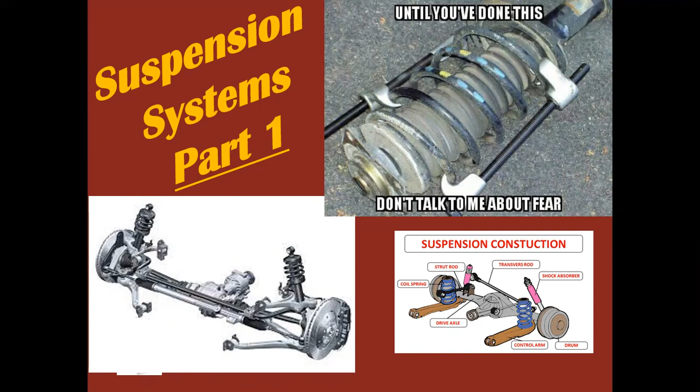We're going to talk about suspension systems today, and this is just part one. So all we're really going to do is review tires and wheels real quick, make sure you're fresh on it, and then we're going to get into wheel bearings, the different designs and types, and how you service those. That's all we're going to do today. We'll talk about tires, wheels, different types of wheel bearings, and how you service them. Simple enough, right?

Let's review real quick. Markings on the sides of tires, because we're working our way through suspension, and tires and wheels have a lot to do with that. Remember the markings on the side of the tire: there's your width, and your aspect ratio, or height-to-width ratio. The way I remember it, the first number is the width of the tread, and the higher the aspect ratio number, the taller the tire is - not necessarily wider, just taller. And your rim diameter is the very last number.

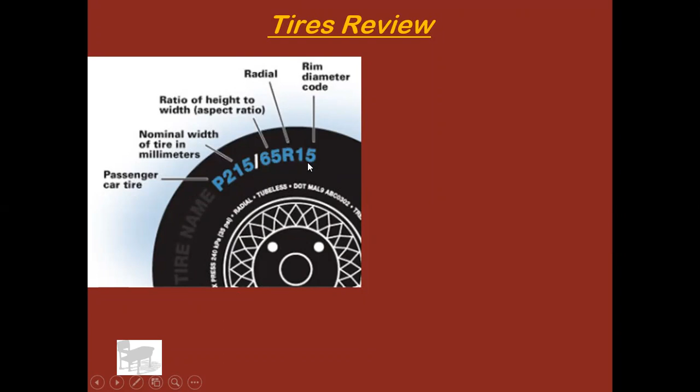There's your cutaway of a typical tire. Remember, the tire seals at the bead - right in this area. That's what matters, and that's what has to be clean when you're popping a new tire onto a rim.

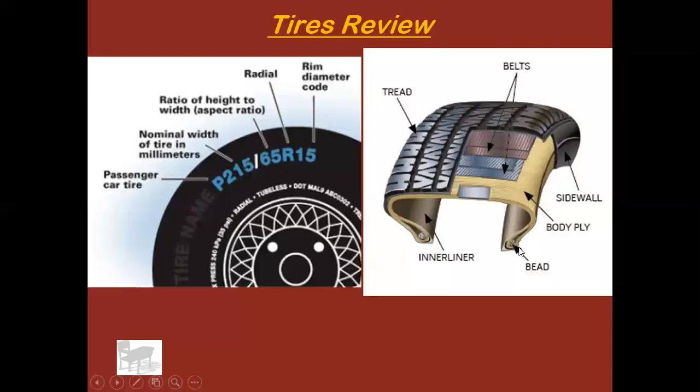Tires are rated for different loads. This is more of a truck tire, but notice it says right on the side: maximum load 2,830 pounds at 80 psi cold. So that tire can support about 2,800 pounds, and it's a load range E, as in Edward.

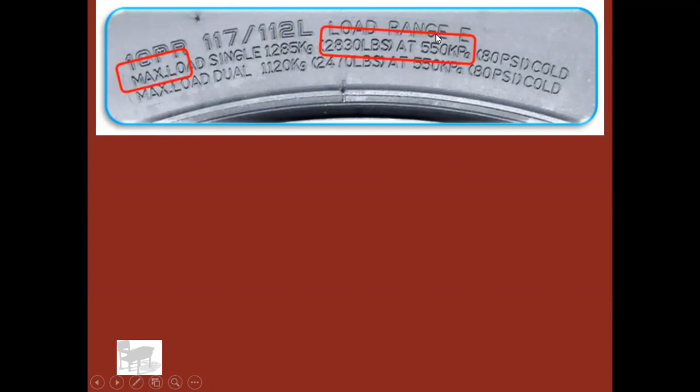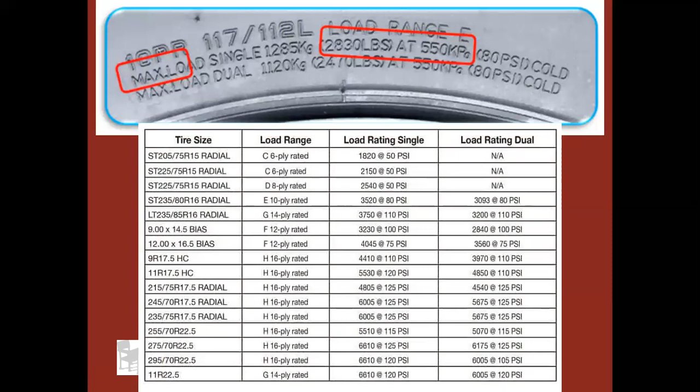Here's a quick chart - again more of a truck tire chart, but that's what you guys typically deal with anyway. The load range has to do with how thick the tire is, how many plies it has, and then you can see the load rating for the tire. Single means a regular single axle, not a dually like on the right side. Let's find our load range E right here - 10 ply, like a 10-layer tire. That's a real heavy duty tire, rated around 3,500 pounds per tire. Makes sense, right? Just gives you a rough idea.

Okay, enough about tires. I think you guys remember that.

Wheels - this is what's typically not remembered correctly or gets messed up. If you're looking at this cutaway, it's the wheel as if you were standing in front of the vehicle looking straight at it. Here is the street side - this side would be facing out, and this side would be facing into the vehicle.

Some specs to remember: your bolt circle diameter, or lug circle - that's the measurement from one end to the other. The diameter is not the outside of the wheel from top to bottom; it's right where the bead actually seats. That's a common mistake. The offset is another common mistake - don't confuse it with the back spacing. The offset is how far the mounting flange is from the center line of the wheel. Back spacing is the space between the edge of the rim and where that flange mounts. So don't confuse those two.

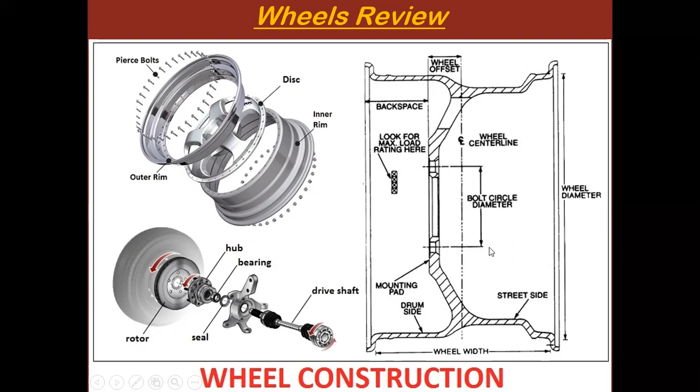Here's another diagram, since that's confused a lot, showing different back spacing. Street side is on the right. There's a lot of back spacing, a medium amount, and hardly any - they call that positive offset, zero offset, or negative offset.

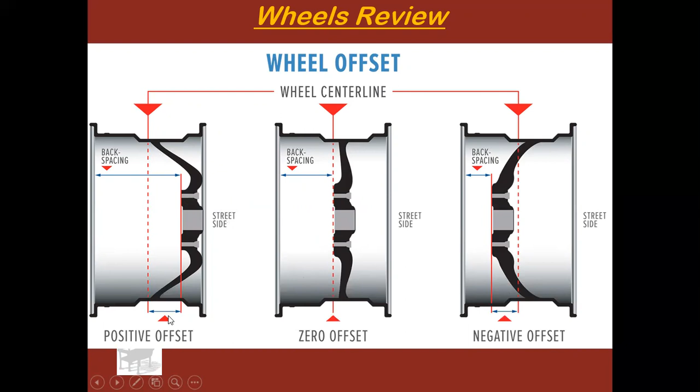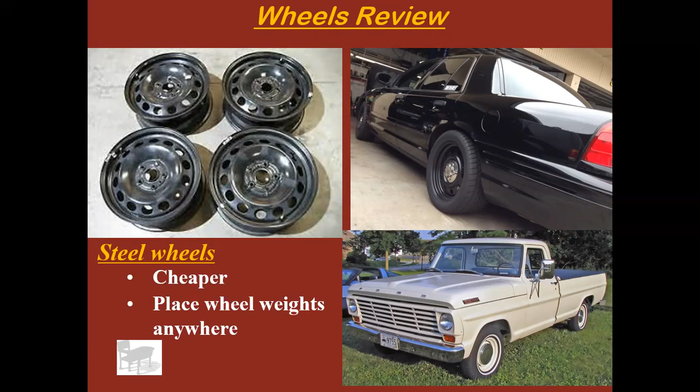Another thing with wheels: there are mainly two kinds, split by the material they're made from. These are steel wheels. They're a cheaper option - you can put wheel weights anywhere on them, on both sides, like you see hanging off there. Pretty easy to balance, but they bend easily. If you hit a curb, you're probably going to put a rash on the side of them, or bend them. You can use soapy water to mount tires onto them. We'll get to the other wheel type, and you'll see why that's not a good idea there.

You should only use tire lube like RuGlyde or Murphy's tire lube. You shouldn't use soapy water, because when the bead pops, the soap gets trapped between the aluminum and the rubber, and it can cause corrosion. Eventually you won't seal the bead and you'll have tire leaks. Your book will tell you to only use tire lube, not soapy water.

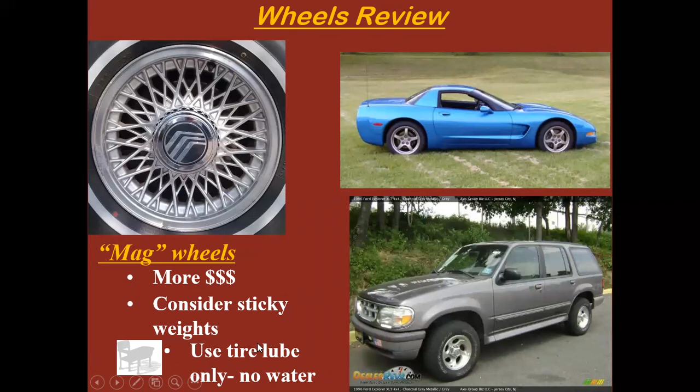The reason I put this picture up is this aluminum wheel. Notice something - why does it have corrosion just right there? Why is the rest of the wheel just about perfect, but right there in that little rectangular shape, it's corroded?

So why is that little rectangle corroded but nowhere else? Wheel weights. Someone stuck a wheel weight on here, and in the wintertime, when you go through salty, nasty roads, those wheel weights hold salt and water against the aluminum, and it turns into that. Don't use clip-on weights on aluminum rims, especially on the outside that faces the road.

I don't know why people do this. You should be using sticky weights instead - they're not that hard to use, and they're not expensive. You should use sticky weights on aluminum rims. Don't let this happen - it ruins a perfectly good set of aluminum rims.

Okay, so that's enough review about tires and wheels. Let's jump into it - there are different kinds of systems for wheel bearings. This is the old school system, common from probably the 1920s all the way up through about 99, maybe 95. You certainly see it in vehicles newer than that too, but that's probably the big era for it.

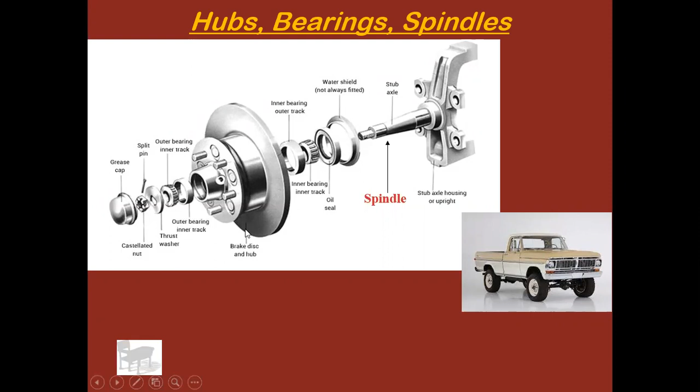I'm going to call it a tapered roller bearing setup, and it's adjustable. Again, used on the front of two-wheel drive trucks and rear-wheel drive cars, approximately pre-2000.

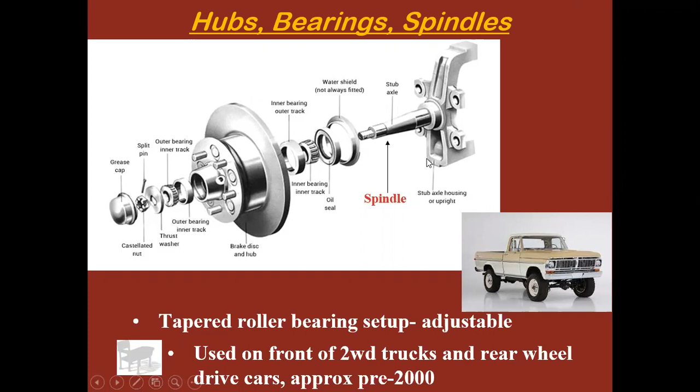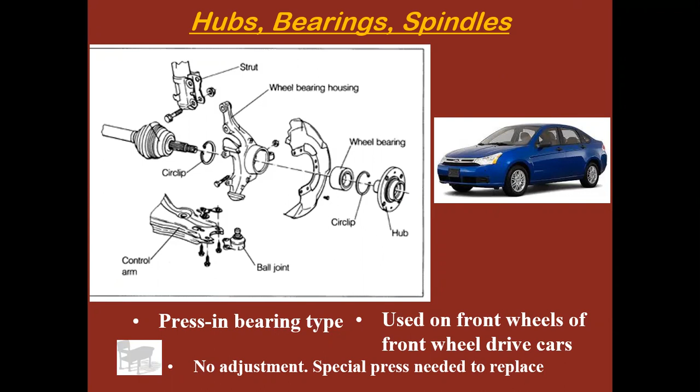It's a compromise. It's still cheap to replace a wheel bearing on this compared to the next setup we're going to talk about, but it's more labor intensive than the previous slide.

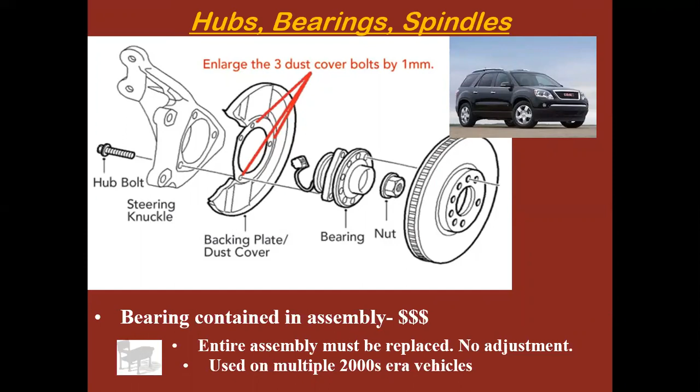The good thing about this is there's no adjustment, if you want to call that good. You don't have to torque anything - well, you have to torque it down to hold it in, but you don't have to worry about adjusting the actual bearings. Unfortunately, you will see this setup a lot.

So let's go back to this setup again, because this is the challenging one. The rest of them, you guys can read the manual and figure out what to do. This one, you kind of have to try it in class - you kind of have to practice. So let's go back to this.

And learn how to pack these bearings when they're new. Go ahead and watch this video.

All right, you should have just watched that video. It shows you how to pack bearings. You guys are going to have to do that.

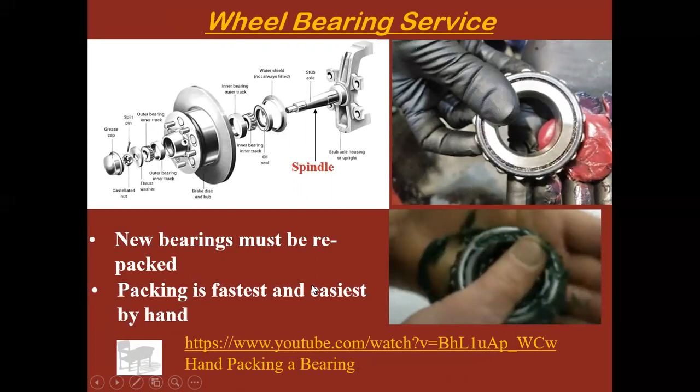Once you pack these adjustable roller bearings and go to reassemble them, there's a special procedure too. It's not just a torque - not just 'torque it to 30 foot-pounds or 100 foot-pounds.' You torque it, then loosen it, then torque it to a different torque and loosen it again, and you just keep doing that over and over. It's kind of an interesting process, and if you follow the manual and do it all correctly, it does work, but you've got to do it correctly.

Go ahead and watch this video this time. I'll give you a preview. Okay, you should have just watched that video.

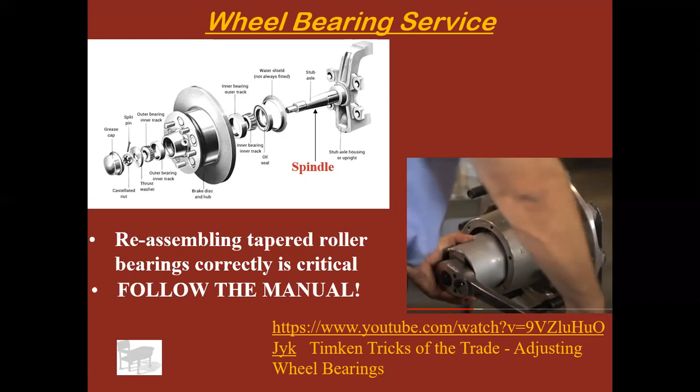Hopefully that gives you an idea of how tapered roller bearings are adjusted and or installed. It's going to be different for every vehicle though.